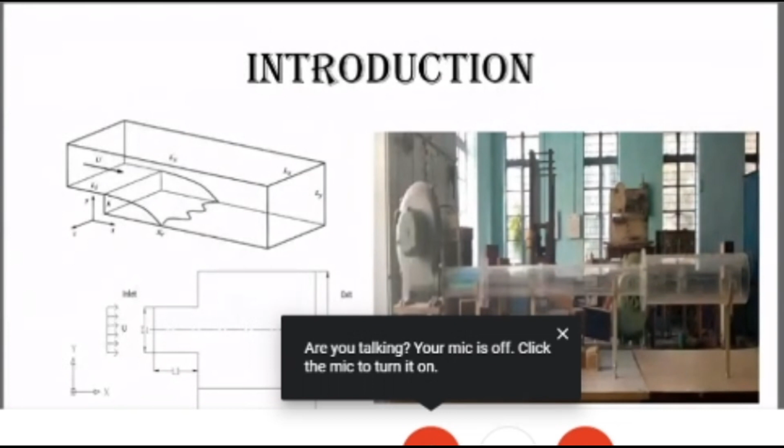By sudden expansion, we mean there is a duct or pipe flow, fluid flowing in a duct or pipe, and that duct or pipe suddenly changes its size — by size I mean its characteristic length, which for pipe flow can be the diameter. Because of this sudden change in geometry, certain flow features develop which are very interesting, as we'll see. In turbulent flows, there are many more interesting phenomena that come up, with consequences both for engineering purposes and for the core physics of the flow problem.

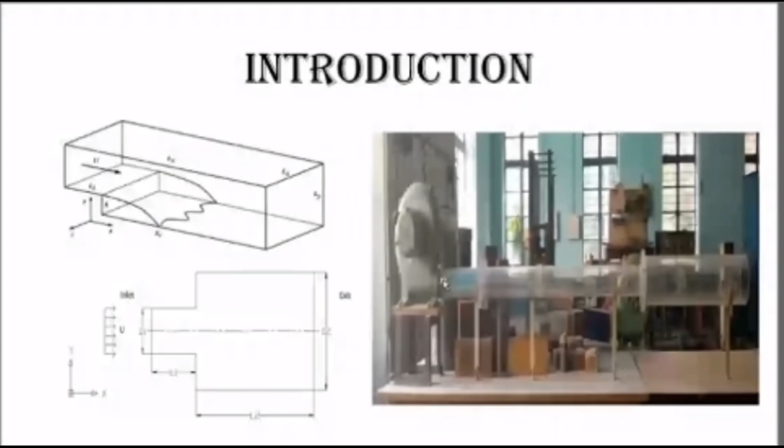As we can see, I've shown a schematic diagram of a duct flow and a pipe flow with sudden expansion geometry. This pipe flow setup is one in which I conducted experiments at Jadavpur University, Kolkata, in the mechanical engineering department. Here we can see a pipe of smaller diameter, then suddenly the diameter increases to a larger value — this is what we mean by sudden expansion of geometry.

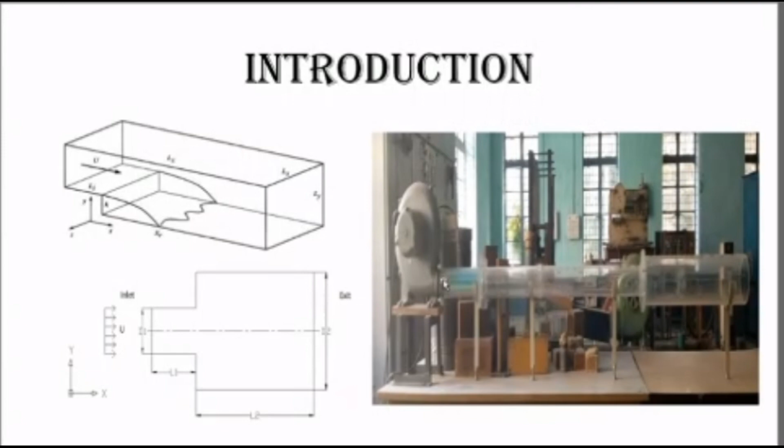There will be some very important changes in the flow pattern at the point of expansion, and as we go along, these changes slowly die out. Why do we need to study sudden expansion? This is the type of content you'll see in textbooks — research papers won't give you such content. They directly present what experiments or computational methods they used and what results they got; they don't explain the why, what, or how. But since this is the first meeting, I'll be covering some basics as well.

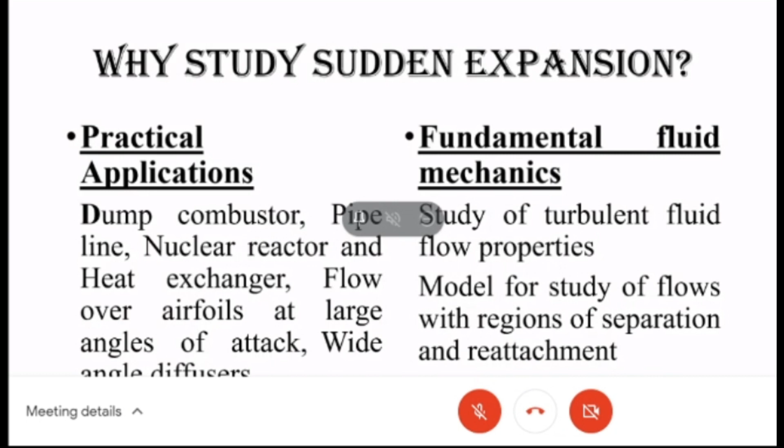Sudden expansion has a lot of practical applications, definitely from the engineering point of view. These types of geometries are found in heat exchangers, dump combustors, pipelines, flow over airfoils, and many more applications.

From the fundamental fluid mechanics point of view, from the physics of the flow, it is very important that we study these phenomena because they give you a lot of idea about turbulent flow properties. As we go along, we'll see the main motive of studying these flows: they are a very good model for the study of flows with regions of separation and reattachment. What is flow separation? What is reattachment? We'll move along and see.

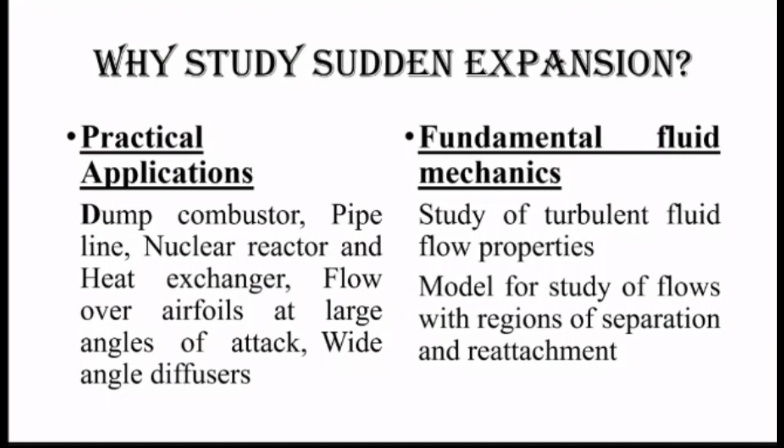I read a few papers on this topic which explain all these phenomena, why we study this, and what we have got from studying this. In these slides, I mention around 10 to 15 papers which have given good results about this topic. So there are many studies conducted.

People conducted a lot of studies using experimental techniques, using computational techniques, and some very few using analytical techniques. As we all know, turbulent flow is also governed by the Navier-Stokes equation, which is unsolvable in its full form. So we just take some approximations of the Navier-Stokes equations and get some analytical solutions. Like for the Couette flow, we have a solution. For plane Poiseuille flow, we have a solution, but not for all domains. So for turbulent flows, Navier-Stokes also predicts the nature of the flow, but a complete analytical solution is not possible.

So most of the research focuses on either experimental methods, and the more recent papers focus on computational methods, because computational methods are slowly developing as we progress towards the 20th and 21st century. In turbulent flows, we basically have three classes of simulations: DNS, direct numerical simulation; LES, large eddy simulation; and the RANS method, Reynolds averaged Navier-Stokes simulation.

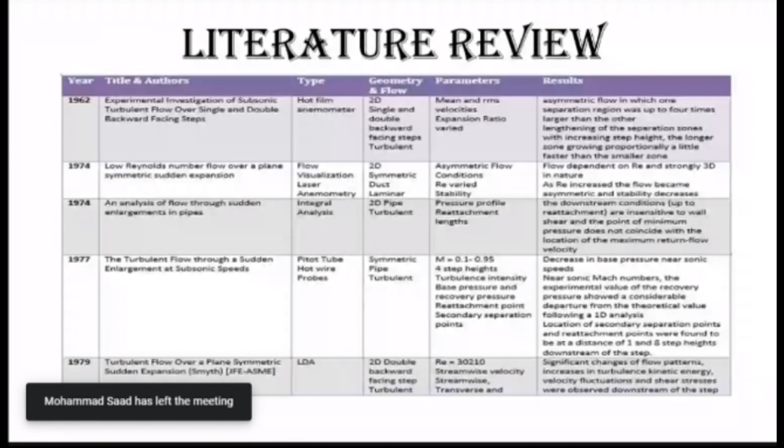Generally DNS simulations are very costly. By DNS we mean solution of the entire Navier-Stokes equation in its full form by computational means. It is very costly because for turbulent flow the data generated is very large, and we would need a lot of memory as well as a lot of computational power. So generally DNS is conducted for simpler problems, and this is actually a simpler problem because the geometry is simpler, but it has considerable, very good implications.

Then we consider the RANS equation and LES. These are a bit complicated. RANS is still simpler: we do some mean decomposition, Reynolds decomposition of the Navier-Stokes equation, and arrive at a mean equation for the mean flow and the fluctuating flow. Basically, by turbulence we mean fluctuations in the flow. In very vague terms, if the flow is turbulent, we mean it is fluctuating — we cannot predict it, it's unpredictable.

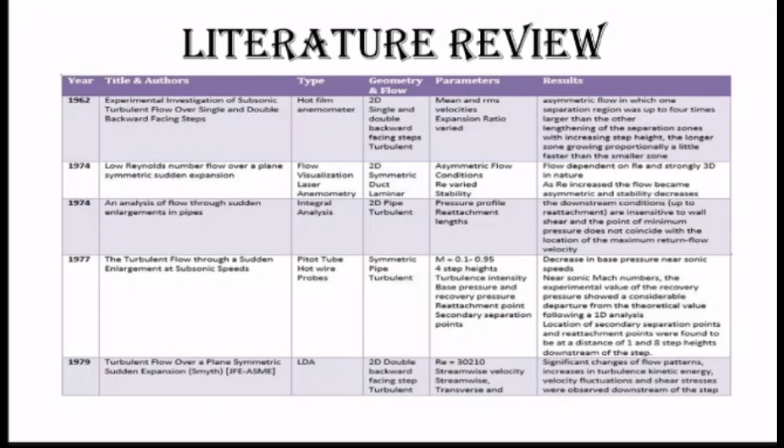So in the RANS method, what do we do? Using statistical means, we separate out and find a mean flow and then a fluctuating flow. So the total flow is a sum of the mean flow and the fluctuating flow. Then we take an average of the Navier-Stokes equation and separate out the mean flow to get an equation for the fluctuating flow. Then there are a lot more equations and calculations, and we arrive at simpler equations than the entire Navier-Stokes, and then we solve for the mean flow and do some simulations.

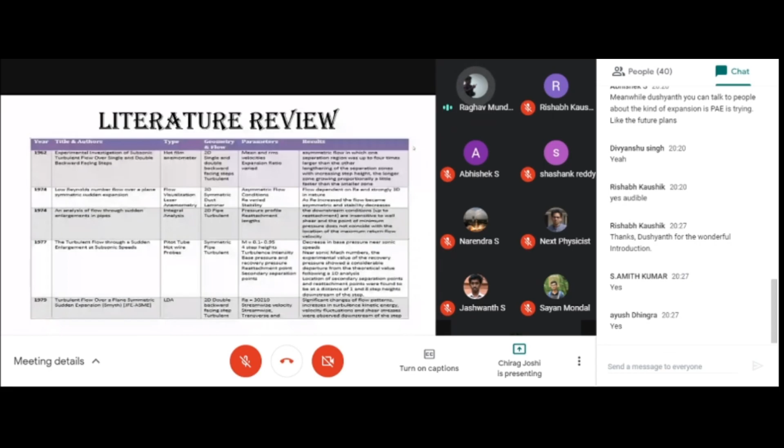So leaving the details, just for a short literature review: people have conducted DNS studies, RANS studies, LES studies, and experimental methods. All are given in this short survey — the author, what work they have done, everything is given. So I won't go into the details of every paper.

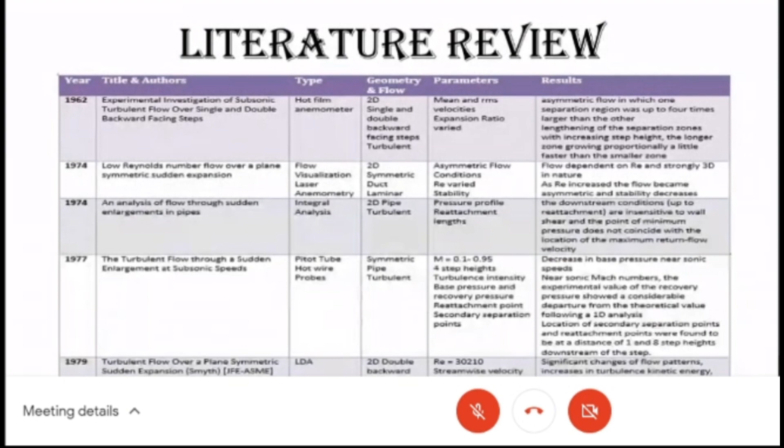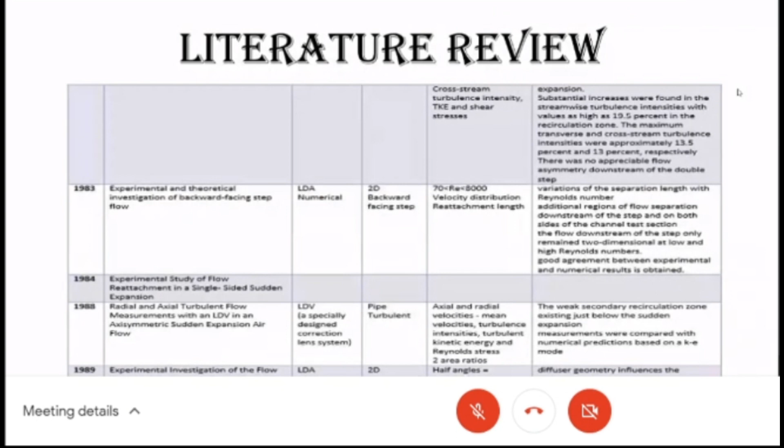As we move along the slides, we'll see what people have done and the summary of their work. These papers are arranged chronologically, so if anyone is interested in seeing the work done, you can just ask for the slides. After reading these papers, each one won't contain a good description of the flow — they will just focus on what they have done, their work, what they found out, and how they did it. So it won't be textbook-style knowledge. Whatever I am talking about is totally textbook-style content, and I will try to give some content from a few papers, how papers are written.

So after reading all this literature review, after going through these 10, 13, or 15 papers, what I found about the flow feature — the flow of this sudden expansion — is that in this sudden expansion flow, you will find that there is a potential core.

Potential core refers to the mid core central region of the flow in the pipe, where the flow is a potential flow. By potential flow I mean it is incompressible, non-viscous, and irrotational flow.

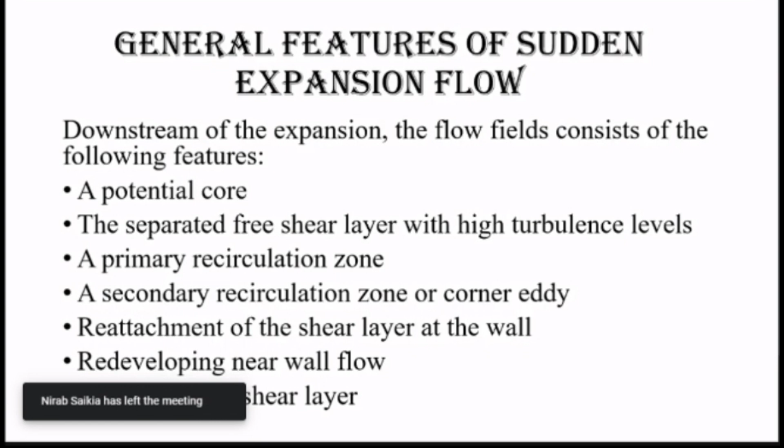But as we go towards the walls, just after the expansion, downstream of the expansion, there will be a separated free shear layer with high turbulence levels. Then there will be a primary recirculation zone, and also a secondary recirculation zone or corner eddy.

There will be a reattachment of the shear layer at the wall, followed by a redeveloping near wall flow. Finally, as the flow progresses, it starts redeveloping and forms a relaxing outer shear layer, eventually becoming like a parabolic profile as we go much away from the expansion zone.

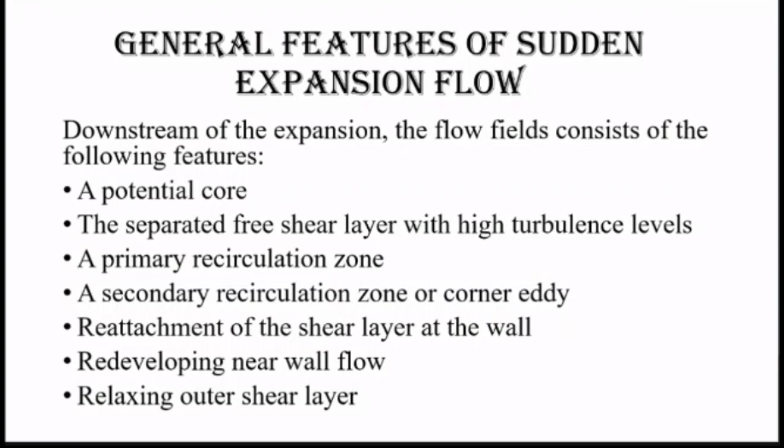Since these terms are very complicated to explain by reading, I'll show you the diagram. As you can see, there is flow going through a duct with some height, and at some point the height suddenly increases.

At the point where the height increases, because of the large pressure gradients there, the adverse pressure gradients, and because of the change in geometry, the flow separates. By separation of the flow, I mean suppose the flow is moving very smoothly and is in contact with the walls, and suddenly, because of the change in geometry, the flow separates.

By separation, I mean the flow is losing contact with the wall. So the flow is separating. This is the vague meaning of the word separation. This is what I meant by a separation zone or region, a separating shear layer.

Since the flow separates, in the region where there is no flow between the wall and the main flow, the potential core, there will be a recirculation zone, where the flow will be moving in eddies or vortices.

Then as the flow goes along, there will come a point where the flow again joins with the wall or with the domain boundaries. This is what we call the reattachment point. And then the flow will continue moving, and there will be a redevelopment of the flow.

So all these are demonstrated in the figure, and the central region, that is the region away from the wall, will be a potential core zone. This particular region, regions 2, 3, and I guess 4, these are very important for the study of turbulence.

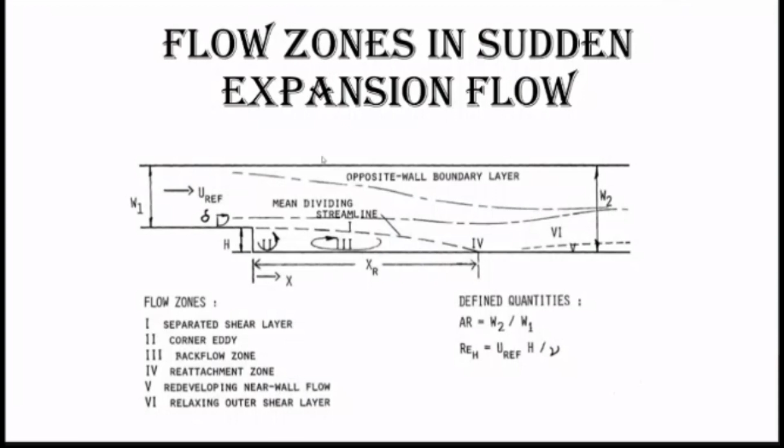So this was the style of content which you can find in textbooks. They explain everything, what is there, the phenomenon, what the flow is like. Now I will be focusing on one such paper which is there in the extensive literature I showed in the previous slides.

They found some interesting experimental findings, so I'll begin with the first one: the double backward facing step.

We saw there can be a flow in which the expansion is only on one side of the flow, and we can also have it on both sides, like the pipe flow which I showed earlier. So in the double backward facing step or a pipe flow, although the domain is symmetric, we see that there are pipes which are symmetric domains, but the flow downstream of the expansion is found to be asymmetric.

We find that the flow is asymmetric. How can it be asymmetric? It was found through experimental means originally that after a particular expansion ratio of 1.5 - by expansion ratio I mean the diameter of the larger tube divided by the diameter of the smaller tube -

If that exceeds 1.5, then the flow is asymmetric. The flow will definitely separate at the point of expansion, then reattach at some point. It was found that after the expansion ratio of greater than 1.5, the point of reattachment, or the reattachment zone, had a length that was different in the lower part of the tube versus the upper part, making the flow asymmetric.

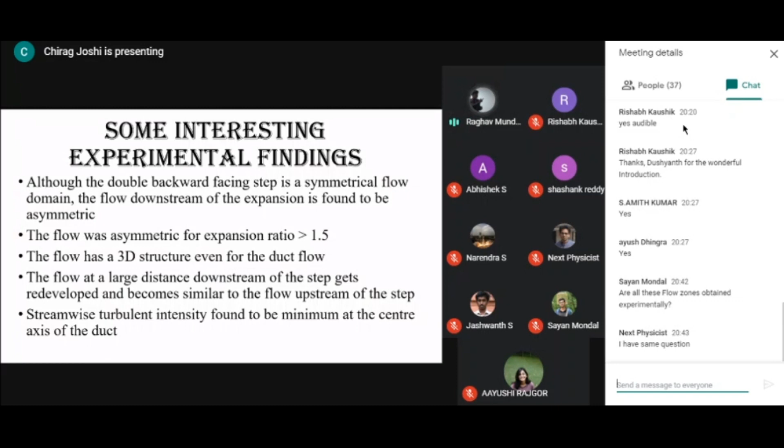That means suppose the lower part of the tube has a reattachment length of 1 centimeter. Reattachment length is the distance between the point of separation and the point of reattachment. So suppose that length is around 1 centimeter in the lower part of the tube, and it may be 1.5 or 2 centimeters in the upper part. So it was found that there is some asymmetricity in the flow.

It was found that even if we take a 2D duct flow and make the inflow conditions two-dimensional, after the expansion the flow becomes three-dimensional. The expansion zone is such that the flow will have vortices, and the shear develops such that the flow becomes three-dimensional. Another important feature was that the flow at a large distance downstream of the step gets redeveloped and becomes similar to the initial flow, similar to a fully developed pipe flow.

This happens some distance after the reattachment. These distances are very well experimentally measured and documented, and you can find them in the literature, in the papers given in the references. Now, a few more details which maybe many people won't get through easily.

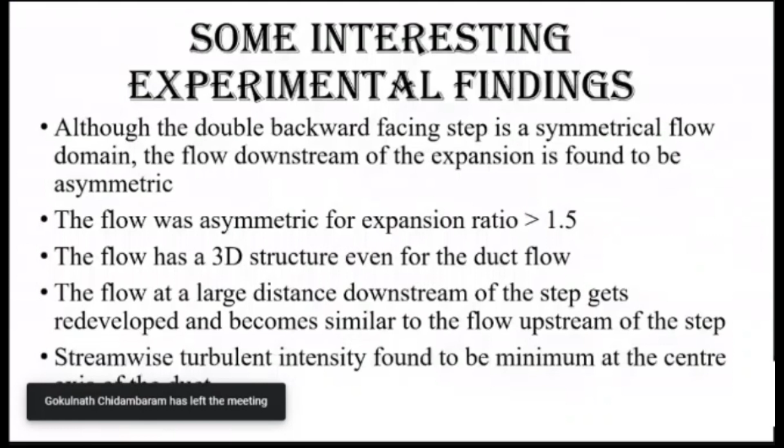Stream-wise turbulent intensity: by turbulent intensity, as I told about the mean flow and the fluctuation flow, the mean flow has three velocity components, U, V, and W. Similarly, the fluctuating flow has three velocity components, small u, small v, and small w. So the turbulent intensity is the mean of the fluctuation, small u mean, whole square.

Similarly, small v mean whole square. By streamwise turbulent intensity, I mean u, since U is in the x direction and streamwise is the x direction. The streamwise turbulent intensity is found to be minimum at the center axis of the duct.

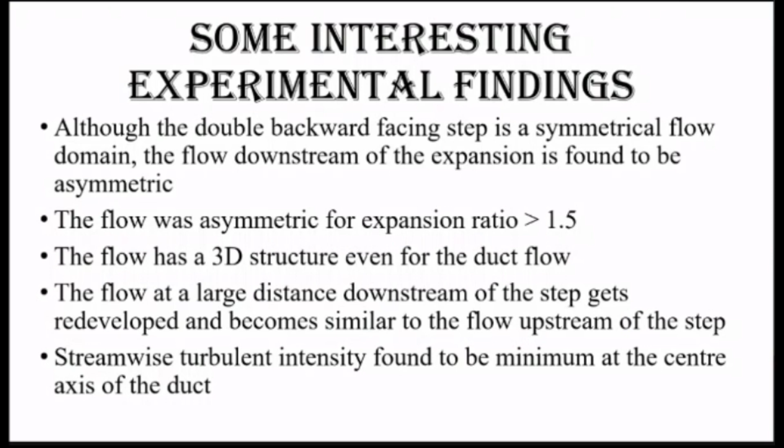The transverse turbulent intensity, by transverse I mean small v along the y axis, has a flat profile in the core region and decreases rapidly at the edge of the recirculation zone. Going further downstream, the maxima coincides with the edge of the recirculation zone, with minimum intensities at the central axis — the nature has just reversed. Initially it was decreasing towards the wall, and now it has increased in the recirculation zone and starts decreasing in the core region. This is something interesting.

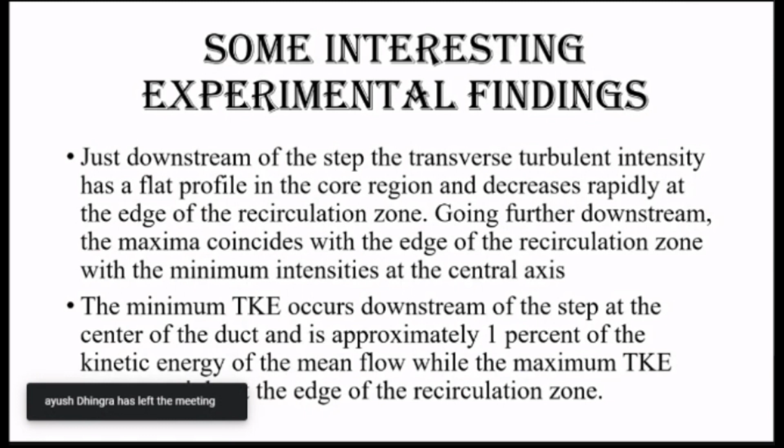The minimum TKE — by TKE I mean turbulent kinetic energy — is just the square of the fluctuating velocity components divided by 3: the mean of small u square plus small v square plus small w square, divided by 2, whole divided by 3. So the minimum turbulent kinetic energy downstream of the step at the center of the duct is approximately 1% of the kinetic energy of the mean flow.

As I already told, we have divided the turbulent flow into two parts: the mean flow and the fluctuating flow. The mean flow has kinetic energy corresponding to capital U square, capital V square, and capital W square. So we just do a comparison between the mean flow and the fluctuating flow.

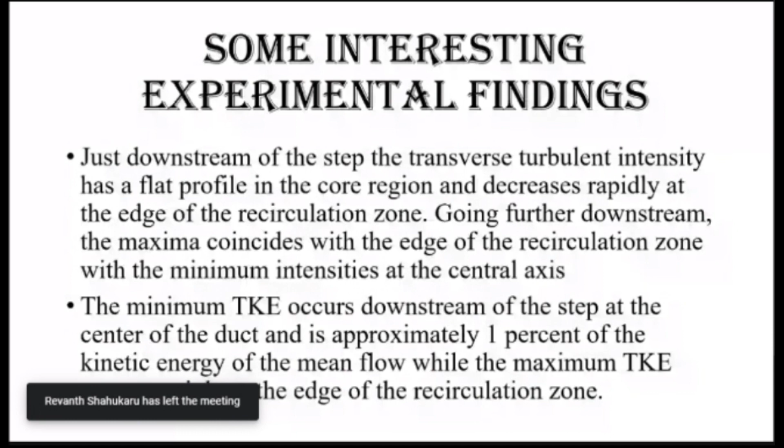If you do a detailed study of turbulence, or have taken a course on turbulence, you will know that the turbulent or fluctuating flow derives its energy from the mean flow itself through the mean shear, and then slowly the fluctuations start dissipating this energy into smaller and smaller eddies till they reach the Kolmogorov length scales, where the energy is dissipated via viscosity. That's the Kolmogorov hypothesis of turbulence — we call this the cascade theory, but that's not the topic here.

Let's move back to the same topic: here we are doing a comparison between TKE and KE. By TKE we mean the kinetic energy due to the fluctuations. By KE we mean the kinetic energy of the mean flow.

The TKE is 1% of the mean flow, while the maximum TKE is at the edge of the recirculation zone. As already mentioned, the recirculation zone has higher turbulent activity, so there will be a higher TKE, turbulent kinetic energy.

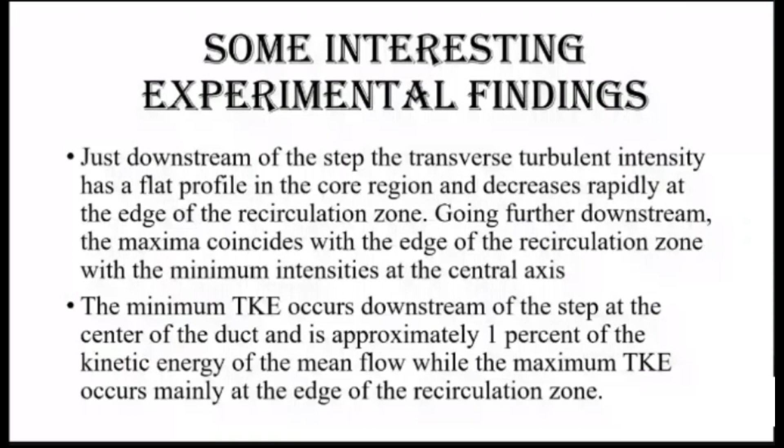Now as we go further downstream, we'll see that the flow has fully recovered. The reattachment has taken place and the flow is now recovering and getting back to the fully developed flow.

It shows a profile of turbulence kinetic energy about 0.5% of the kinetic energy of the mean flow at the central axis, and it increases to 1.3% at about one third y/L from the wall.

We also see that downstream of the step there is negligible shear stress at the center of the duct, because it is a potential flow, there will be almost inviscid flow type conditions prevailing. So there will be no shear stress because there is no viscosity.

In the separated region, the shear stress increases to maximum at the edge of the recirculation zone. As already told, the recirculation zone will have higher turbulent activity, which is seen here.

The peak maximum shear stress decreases as the flow moves further downstream, because as we move downstream, the turbulent activity is subsiding as the recirculation zone is slowly vanishing. So the energy is dissipated and the shear stress is decreasing.

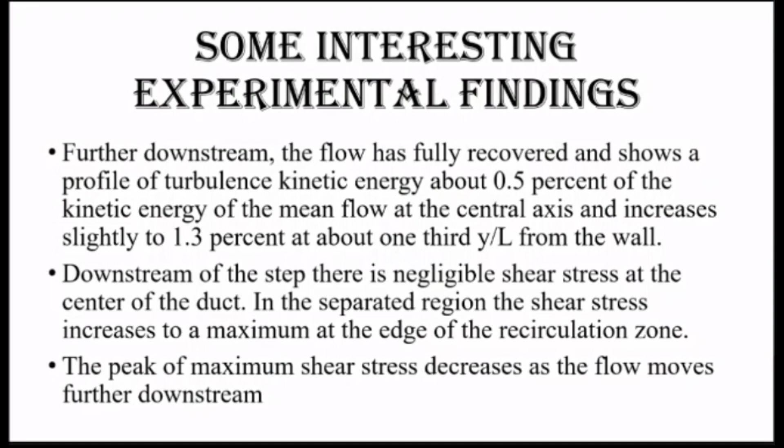The viscosity is decreasing. Let's look at some of the numerical studies of the problem, numerical treatment of the problem. There have been many DNS studies conducted for this problem, and the DNS studies have given quite accurate results, which have been validated by experiments.

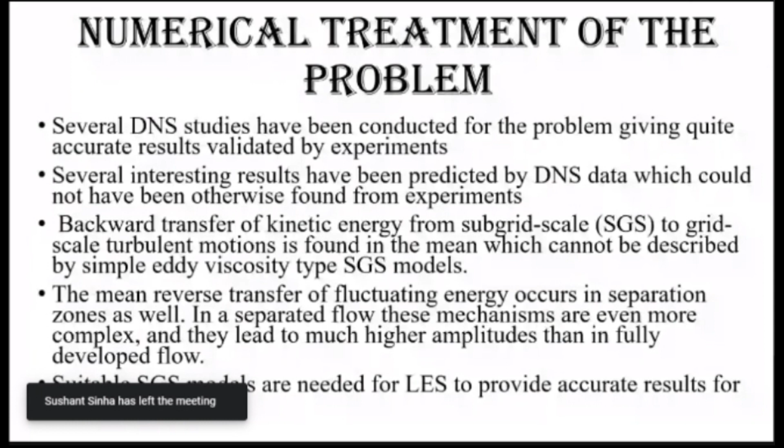I'm not going into too much detail about the LES model, but LES studies have also been conducted, and there are some complicated issues arising in LES and DNS results. The important point is that DNS results have found very good agreement with the experimental results. That is what I want to convey as of now.

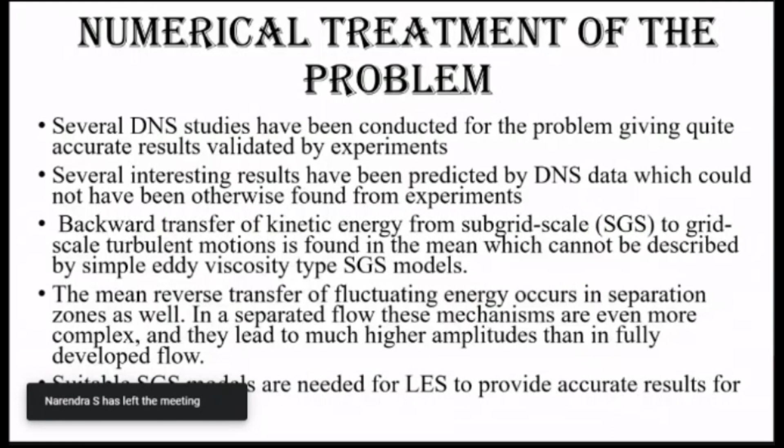There are some DNS studies which showed that there was some backward transfer of kinetic energy from the subgrid scale to grid scale turbulent motions, which cannot be described by simple eddy viscosity SGS models. In LES we model the subgrid scales and then try to find out the results. So it was found that the existing eddy viscosity type models used for LES weren't giving good results, meaning we need to improve the models.

So in general, for a separated flow, a reattaching flow, or a flow with recirculation, the simple eddy viscosity LES models won't be giving good results. It means LES will give results, but not the simple eddy viscosity models.

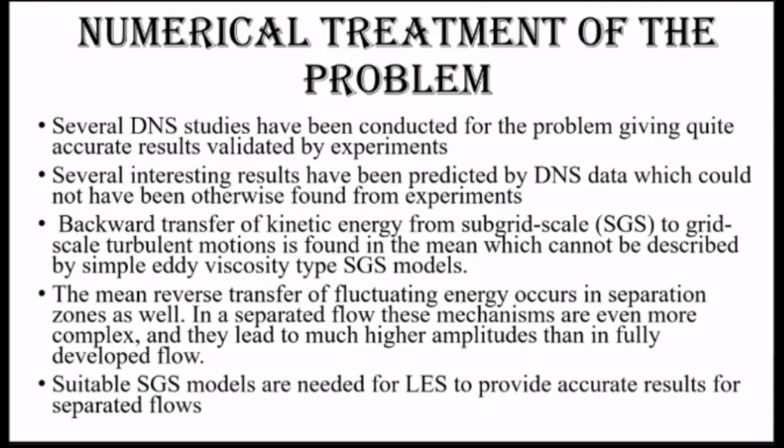Since it is simple to conduct experiments on this flow, we can get good experimental results, and then we can try to improve the LES models and validate them by the experimental data. So studying this flow can help us develop better models for LES. That is what I want to convey.

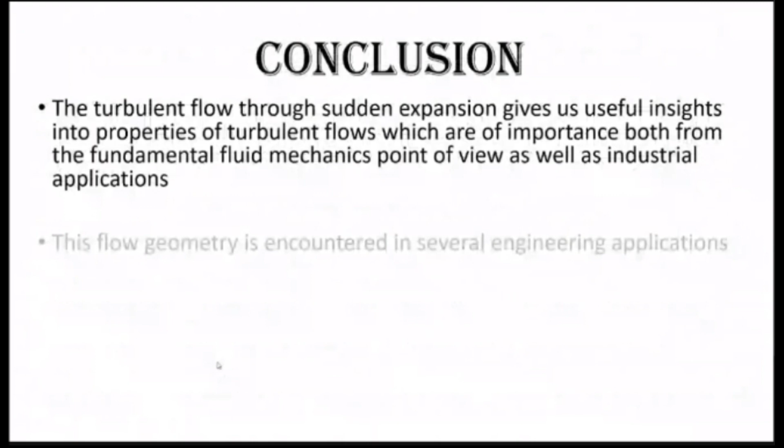So I conclude here. I think it was less of a paper type of thing, more of a literature survey or a review of the present research on this topic. It was more of textbook type content, but also something of a review paper type of thing.

I would like to conclude that the turbulent flow through sudden expansion can give us very important and useful insights into turbulent flow properties itself, as well as engineering. There are a lot of industrial applications of the topic, so it can be helpful there. Moreover, it can help us develop better numerical and CFD models for turbulent studies and for fluid mechanics itself.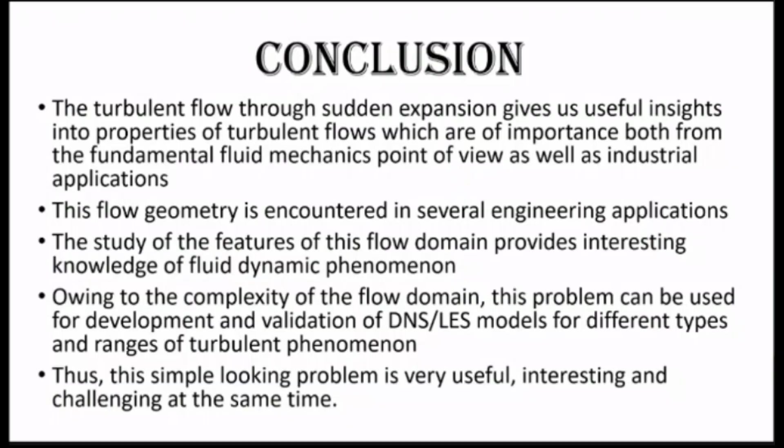Are all these flow zones obtained experimentally? Yes, initially there were experiments. If you go through the papers I mentioned, I've tried to take papers from the 1970s and 1960s. So most of the flow zones were seen experimentally itself, and even I conducted experiments on the same model which I showed in the introduction. I saw those flow zones myself.

They were conducted experimentally, but there is one paper in the Journal of Fluid Mechanics which has analytical results that match the flow zones and predicted it well. They also validated their analytical results using experimental data conducted in the 1960s, 1970s, and so on. So potential flow doesn't mean the velocity field can always be described.

Potential flow is where the potential function's gradient gives the velocity. Exactly, yes, but that can be done. We can describe the velocity field by a potential function only when the flow is inviscid, incompressible, and irrotational.

Is the reason for asymmetric flow gravity? No, there are other reasons. Gravity may be one of them, but there are more complicated turbulence-related things going on there. So gravity can be a good reason, but there's more to it.